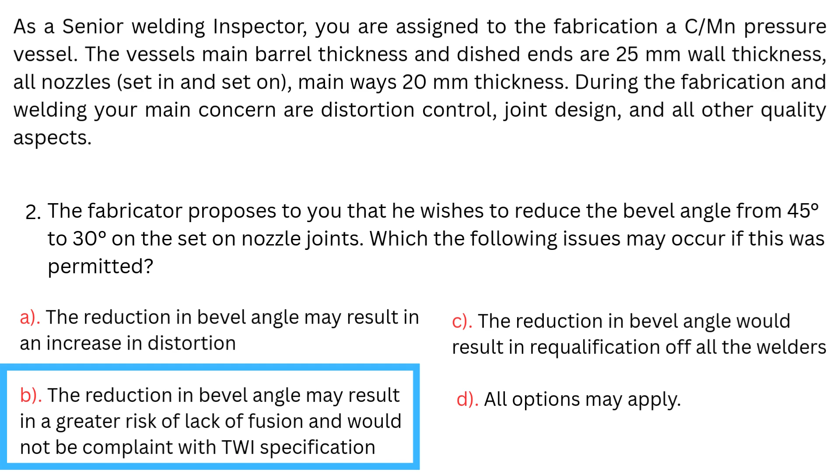The answer is B. The reduction in bevel angle may result in a greater risk of lack of fusion and would not be compliant with TWI specification.

Number 3. When considering distortion, which of the following butt weld preparations would be the most suited for the longitudinal welded main barrel joints? A. Double U butt weld. B. Single V butt weld. C. Single U butt weld. D. All options would produce the same amount of distortion. The answer is A. Double U butt weld.

Number 4. The fabricator wishes to reduce welding time and distortion on the longitudinal and circumferential welds. Which of the following will best achieve this? A. Single V-butt joints, welded by the MMA process. B. Double V-butt joints, welded by the SAW process. C. Double U-butt joints, welded by the SAW process. D. Heterogeneous welds. The answer is C. Double U-butt joints, welded by the SAW process.

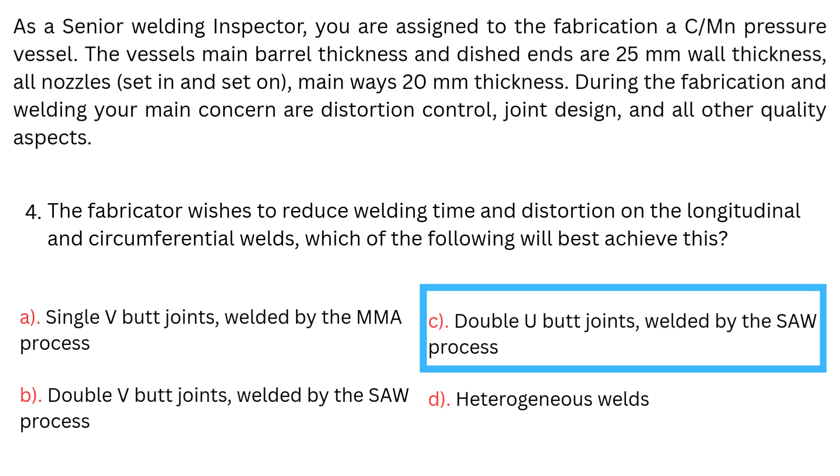Your client has asked you to witness all mechanical testing of weld procedure and welder qualifications. In addition to this, there are current procedures and welder qualifications that require reviewing all testing requirements to TWI specification.

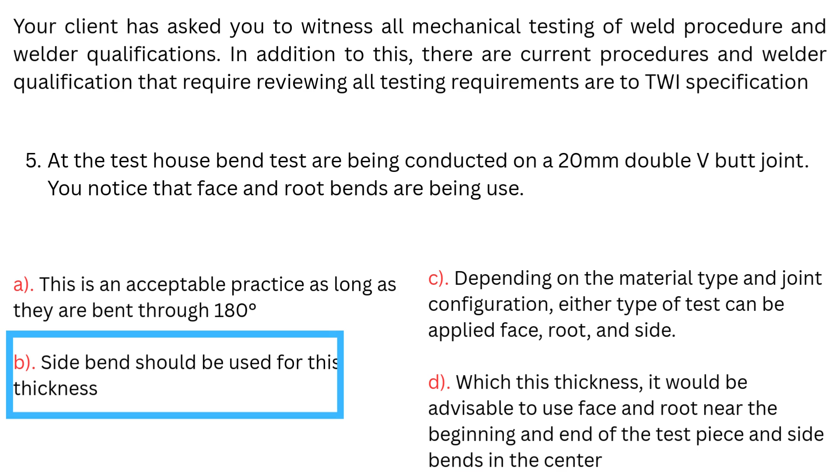Number 5. At the test house, bend tests are being conducted on a 20 mm double V-butt joint. You notice that face and root bends are being used. A. This is an acceptable practice as long as they are bent through 180 degrees. B. Side bends should be used for this thickness. C. Depending on the material type and joint configuration, either type of test can be applied: face, root, and side. D. With this thickness, it would be advisable to use face and root near the beginning and end of the test piece and side bends in the center. The answer is B. Side bends should be used for this thickness.

Number 6. A welding procedure in a 10 mm T-fillet joint configuration on C-Mn steel with a TIG root and MMA fill and cap is being tested. What type of mechanical tests should be employed? A. Tensile, impact and fracture. B. Tensile, macro, fracture and hardness. C. Impact and macro. D. Hardness, fracture, and macro. The answer is D. Hardness, fracture, and macro.

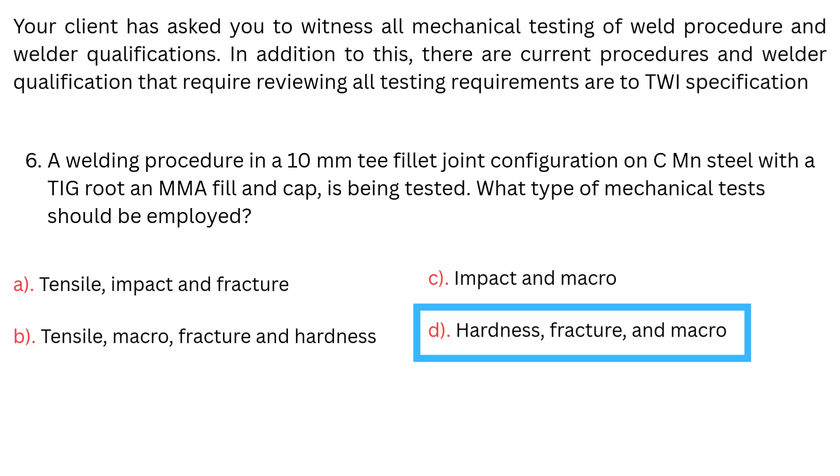Number 7. Transverse tensile tests are being conducted on a 30 mm thickness C-Mn steel butt weld. You are witnessing the recording of the data. Which of the following is correct? A. The UTS was recorded at the point of fracture. B. The maximum load applied should be recorded. C. The Re was the only measurement recorded. D. A percent and Re were recorded. The answer is B. The maximum load applied should be recorded.

Number 8. Elongation values are required for this tensile specimen. The original length was 160 mm and after testing the length was 185 mm. Which of the following is the correct elongation figure? A. 25 N per square millimeter. B. 15.6%. C. 25%. D. 345 N per square millimeter. The answer is B. 15.6%.

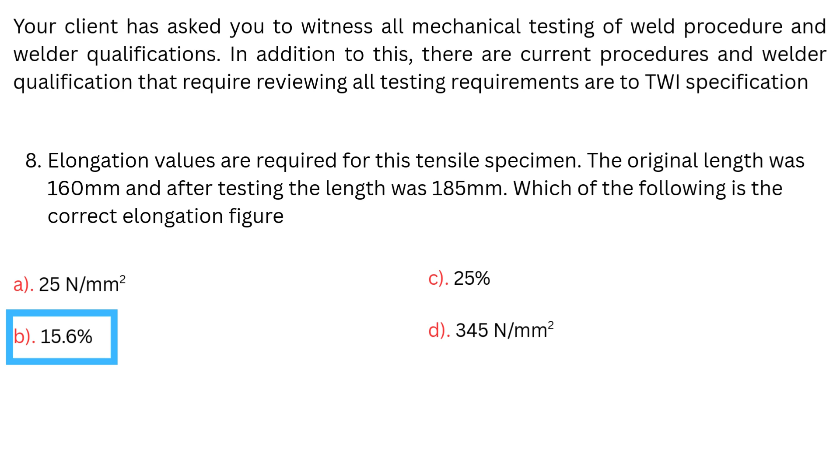You are currently working as a senior welding inspector on a subterranean high-pressure gas supply pipeline. The pipe is longitudinally submerged arc welded, manufactured from X70 grade pipe with a wall thickness of 25 mm, and at road crossings, in areas where additional safety is required, 30 mm wall thickness. The pipeline has numerous locations where additional pipes are to be connected. Some of the attachments are set-in single V-butts, with some attachments being set-on single bevel butts, manufactured from the same materials as the main supply line. All circumferential butts and attachment fittings are welded with the MMA process.

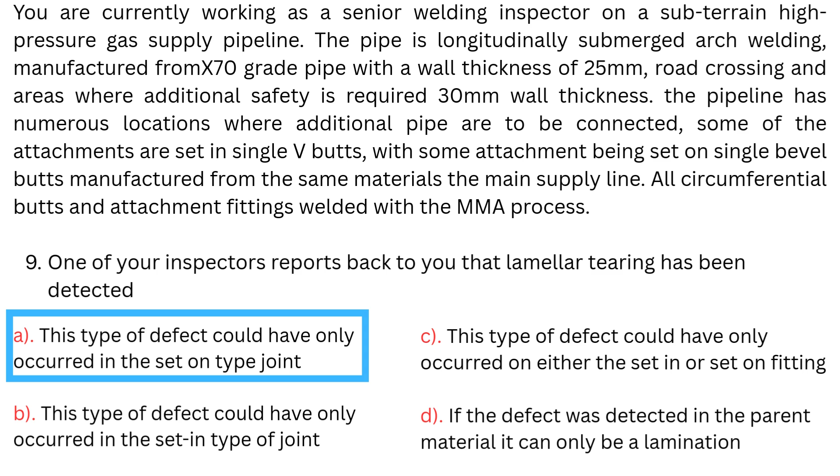Number 9. One of your inspectors reports back to you that lamellar tearing has been detected. A. This type of defect could have only occurred in the set-on type joint. B. This type of defect could have only occurred in the set-in type of joint. C. This type of defect could have occurred on either the set-in or set-on fitting. D. If the defect was detected in the parent material, it can only be a lamination. The answer is A. This type of defect could have only occurred in the set-on type joint.

Number 10. During the interpretation of the radiograph, your radiographer reports that lamellar tearing has been detected on a pipe-to-pipe weld. A. If the defect is located in the pipe, it must be lamellar tearing. B. This type of defect cannot be detected by radiography. C. This type of defect cannot occur in this joint configuration. D. Two options are correct. The answer is D. Two options are correct.